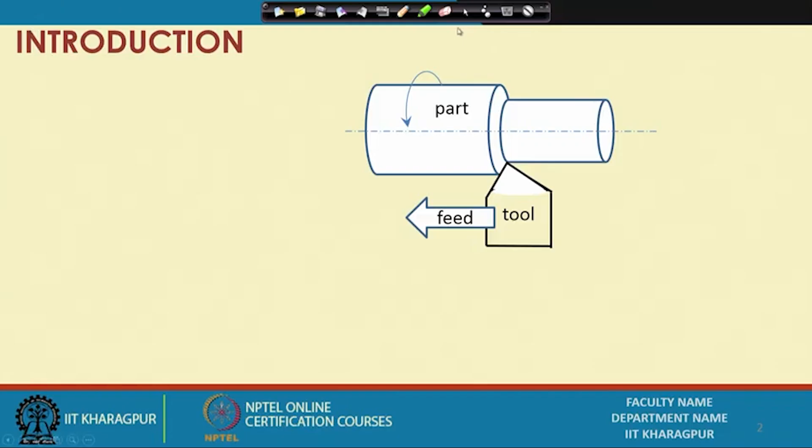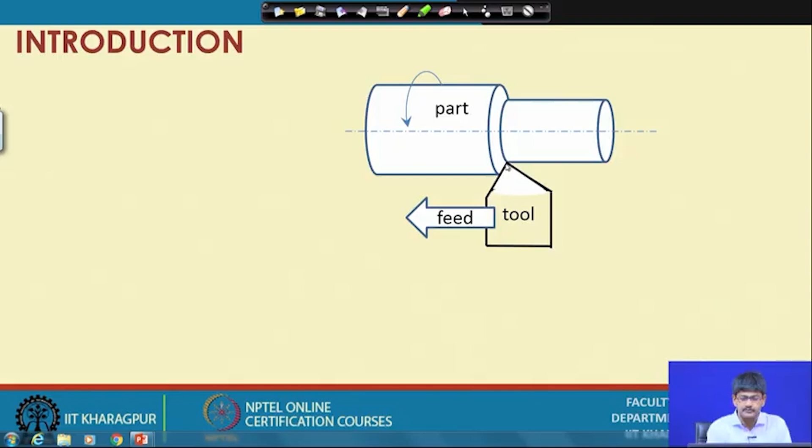Let us have a look at this particular figure. What do we have? We have here a workpiece or part or job shown rotating, and there is something called a tool or cutting tool. It is characterized by a sharp point and some sharp edges, and it is moving past the rotating member.

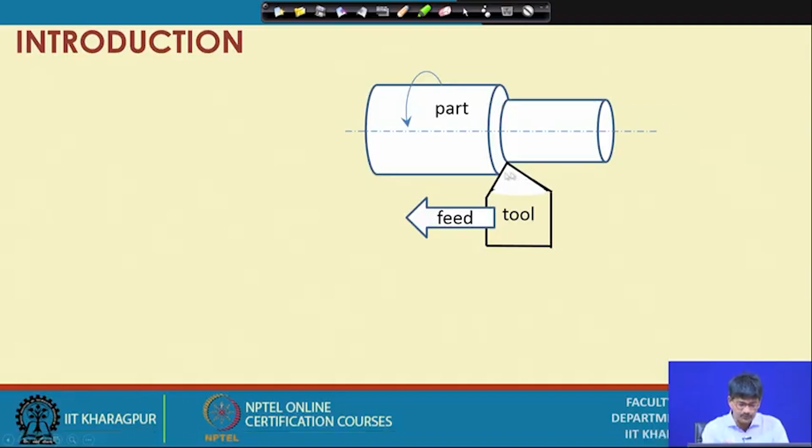Thus removing material. We will look at several other figures in which the removal of material is shown in more detail. When this part is coming here, it gets into the path of the moving tool and this material comes out in the form of a chip. A ribbon of material is removed here.

So, removal of material from a part in the form of chips, so as to attain a desired shape and size. I want to attain a desired shape and size, and for that I am removing material from the main body, which is called the part or workpiece or job. I am removing part of it so that a particular shape is attained. This exercise is always carried out on a part where excess material is present.

But why would we do that? Because there might be intricate geometries present on the surface of the part which cannot be attained by other means. So immediately there is the identification of other methods of attaining a particular predetermined shape and size, and all these things together are referred to as manufacturing.

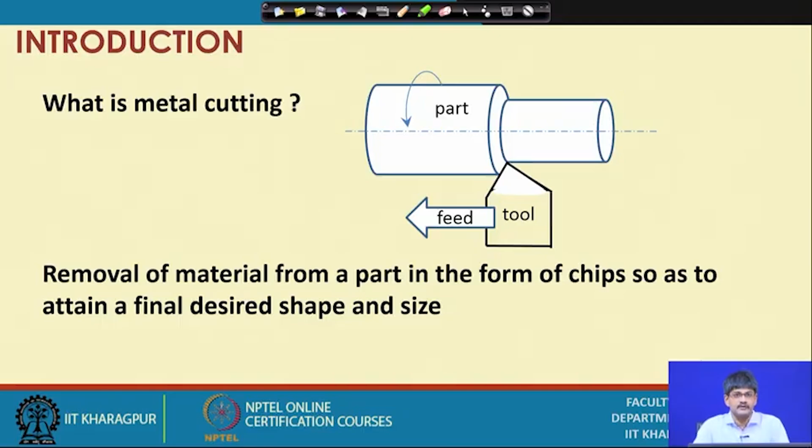Let us have a quick look at what manufacturing is all about. Attaining a predetermined shape and size, this is what manufacturing is all about. We can have different ways of manufacturing these shapes and sizes, and metal cutting happens to be just one of them.

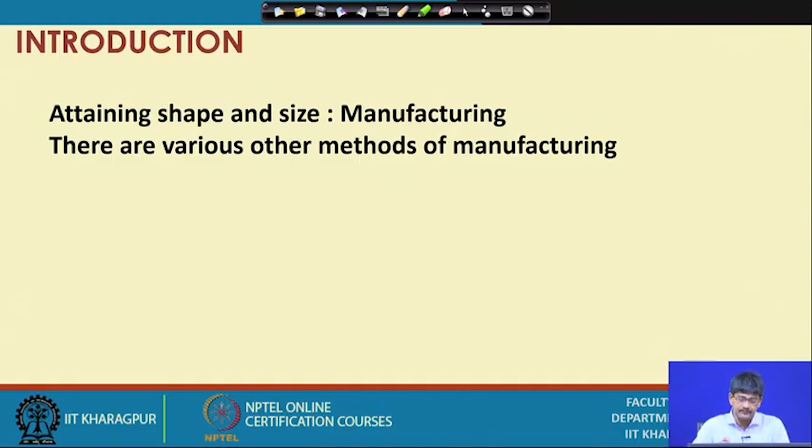So let us have a look. What are these methods by which we can manufacture parts of different shapes and sizes? We can have casting, forming, welding, conventional machining, non-conventional machining, and rapid prototyping. These are some of the main methods of attaining shapes and sizes. There can be other methods also, including hybrid methods, that is a mixture of two of the processes.

Now, where is metal cutting? I cannot see metal cutting or material removal listed directly. Metal cutting belongs to this particular group, conventional machining. Material removal, conventional machining, metal cutting, metal machining, etc., all these things belong to this particular group.

Why are we calling it conventional? Because we are going to apply certain practices, certain types of material removal which can be categorized under a single principle of material removal, and that we are calling conventional.

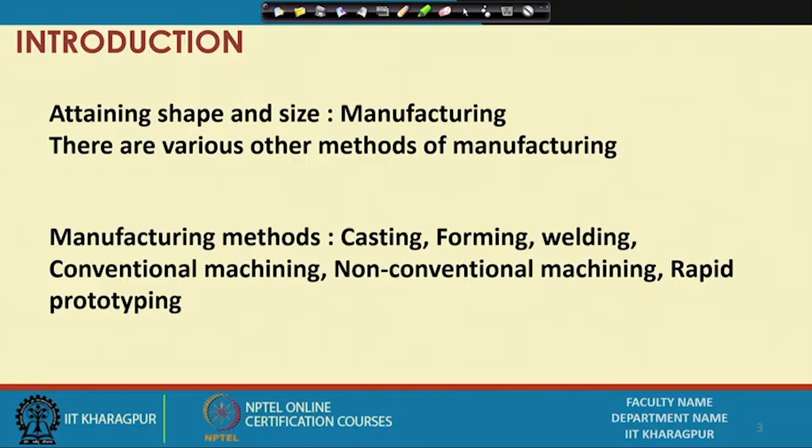I will just try to give you the idea of casting, forming, welding, etc., so that we have a brief overview of the main methods of manufacturing.

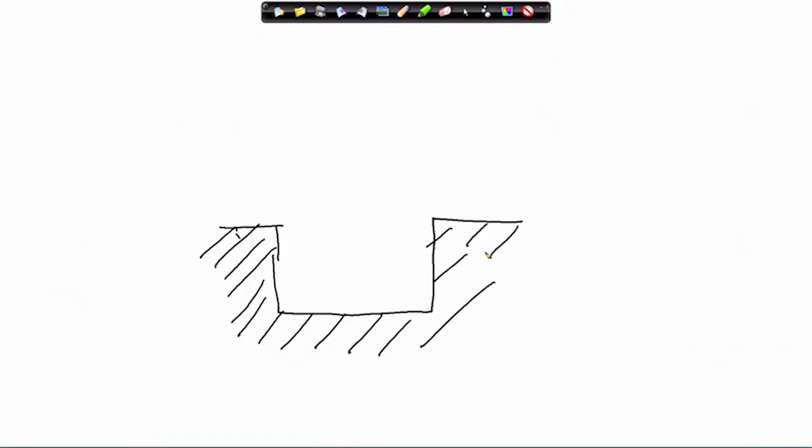Suppose I have a cavity. I am showing very simple principles. So some material is here, so that a cavity is formed. Inside this cavity, I pour molten metal.

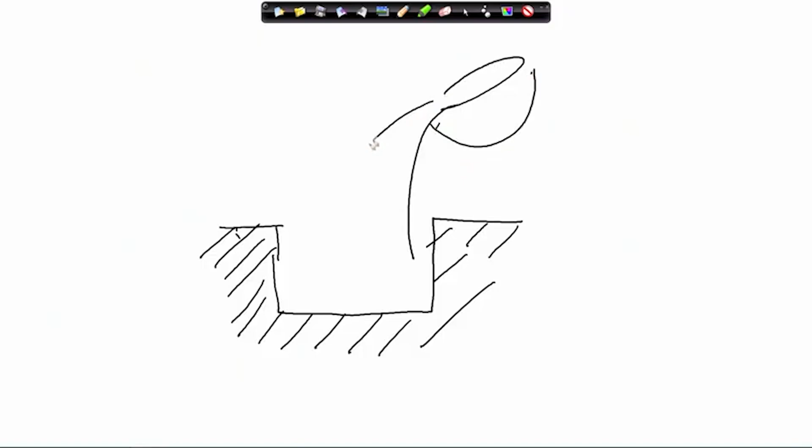Ultimately the molten metal will solidify. If it solidifies, it will attain the internal shape and be of a definite size. So this is casting.

Melt the material, pour it into a cavity of predetermined shape and size, and when it solidifies, we can take it out. We can remove this particular sand mold which is shown here - that can be destroyed, and we can take it out, and we will get a solidified body.

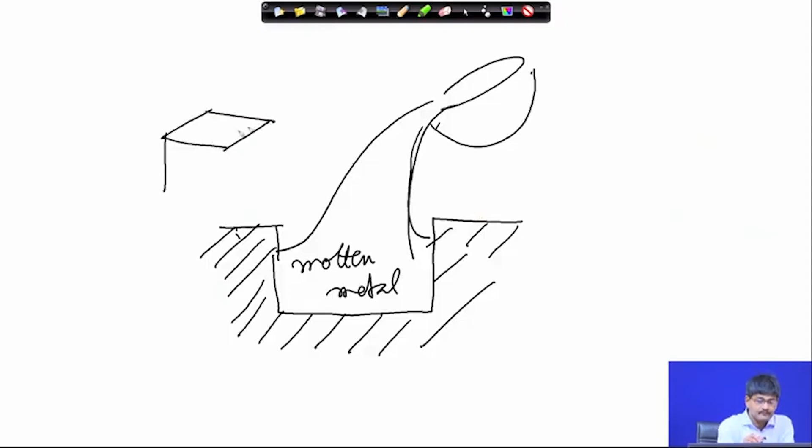Say it might be something like this. And if this is exactly the shape that you wanted, and you are satisfied with the rough surface roughness and whatever imperfections might be there, that is it. In a single process you will be achieving what you wanted.

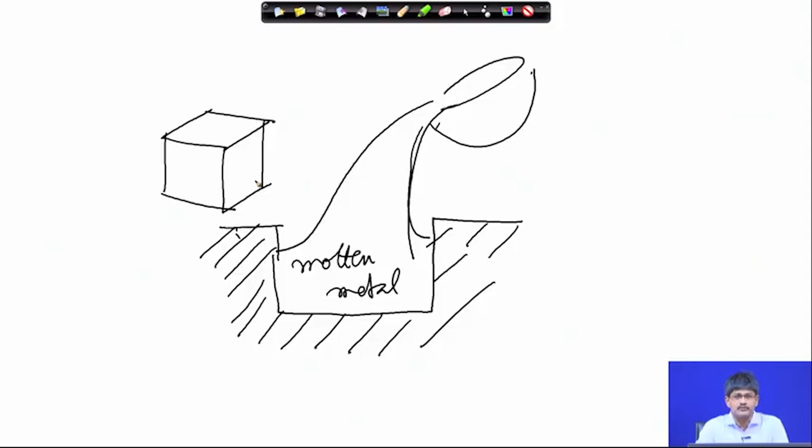If however there are some surface imperfections which you have to do away with, or the surface is too rough, or sand particles are sticking to it - so many other sort of defects can be there. In that case, what we do is we go for secondary processes, in order to make the job or the part or the workpiece or the casting acceptable. So this is what casting is all about.

We basically go for melting and resolidification in a cavity of predetermined shape and size. There are so many other details about casting which I am not touching here, because we just want to have the basic idea by which this particular process works.

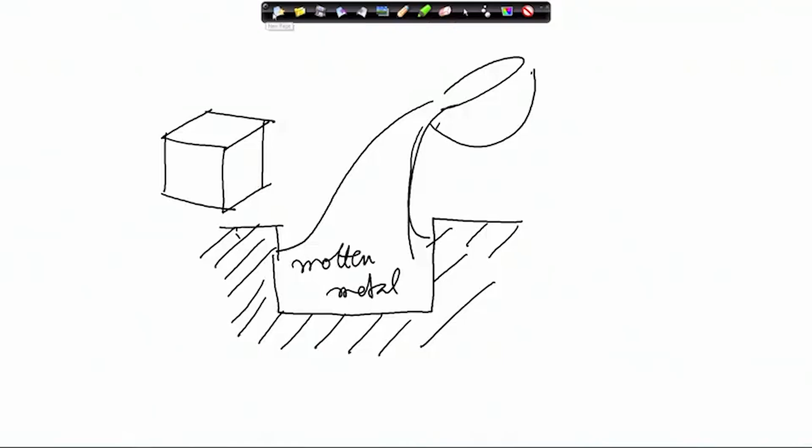So let me quickly go to another page. Here welding - what are we doing? We are fabricating, connecting up these two pieces that need to be joined. So welding is a joining process, we can build up shapes with that.

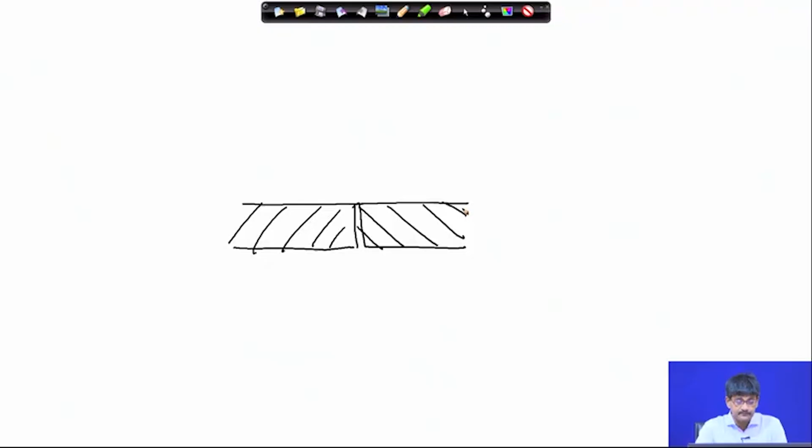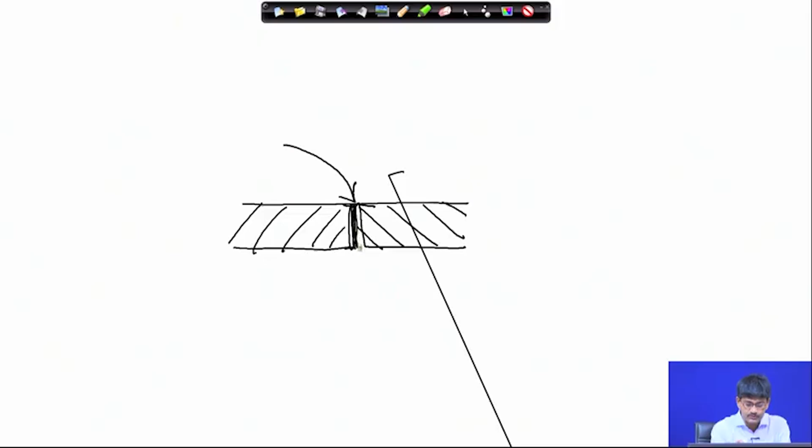Some material in between, or make them very close together and heat them. So if I have two such materials, this is one, this is the other, and I heat them at this point so that this part melts. When it solidifies, this will be a single piece, so that we can join parts and make up shapes.

Our main concern is to make shapes of predetermined shape and size. Many times you might have seen, even in civil activities, gates, grills, window grills, etc., made very elegantly by welding. Just imagine if welding had not been there, how would you have done these things? It is a very important manufacturing process. So we come to know of casting, we come to know of welding.

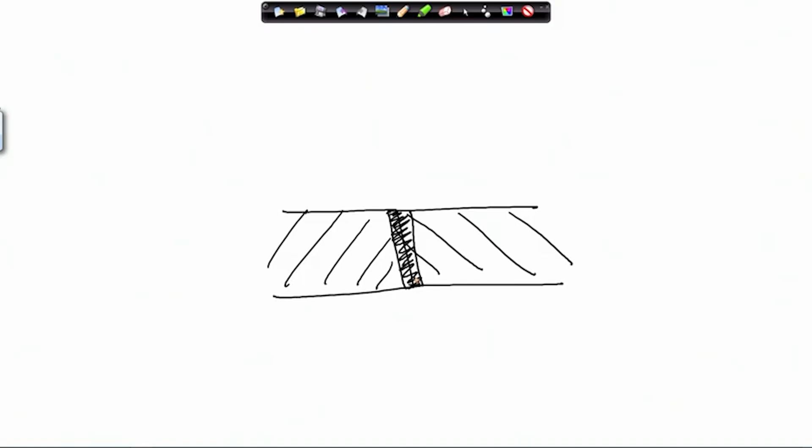Welding can be of different methods, but that is not our concern today. Our concern is to get an overview of the different manufacturing processes, so that we understand where exactly machining or metal cutting or material removal process stands.

Next, we come to forming. Let us have a quick look at forming. Forming method essentially involves deformation - I deform a particular body into a definite shape. Let us have an example. This is a very simple and explanatory example.

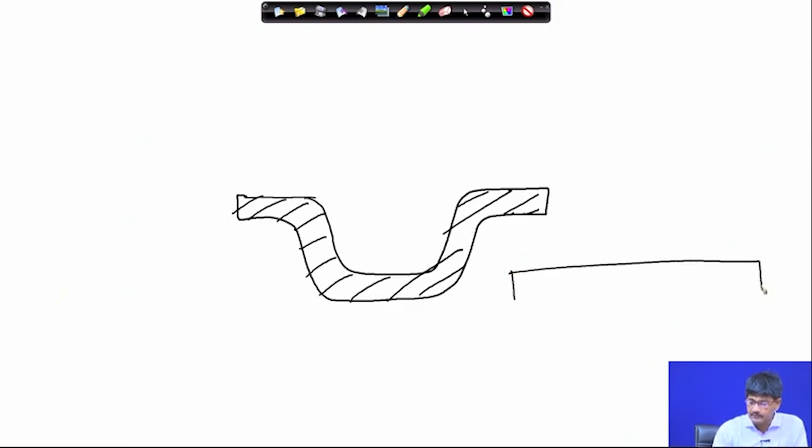Someone shows you this part, a sheet metal, and we are seeing it only from the side, a sectional view. How was this done? It was done by deep drawing. What is deep drawing? Initially there must have been a body of this type, a sheet metal piece, maybe circular, and there was a punch.

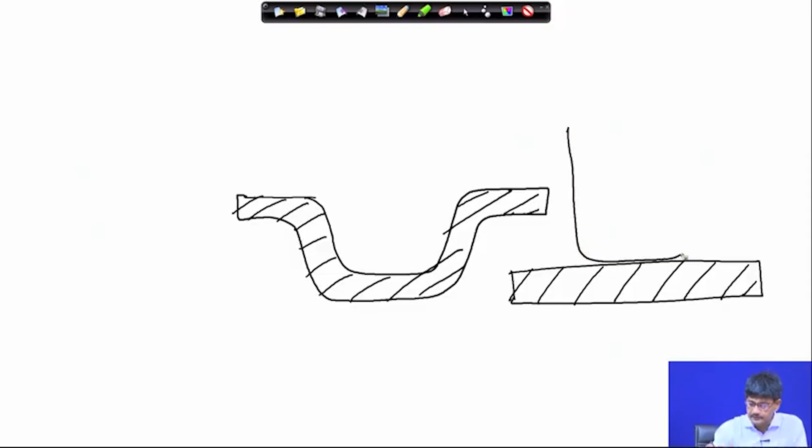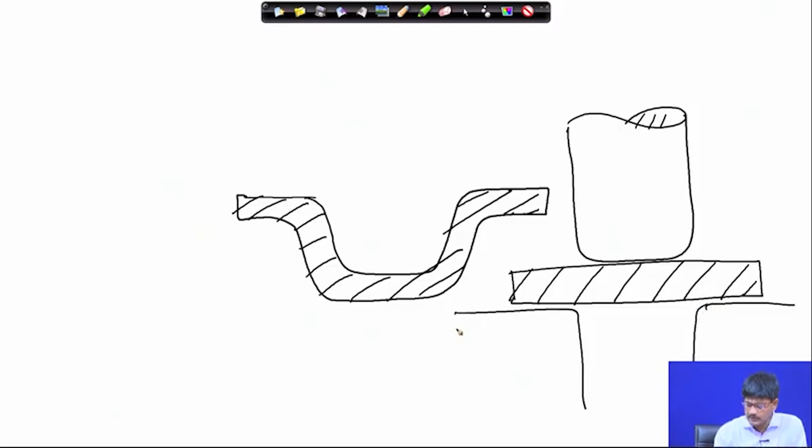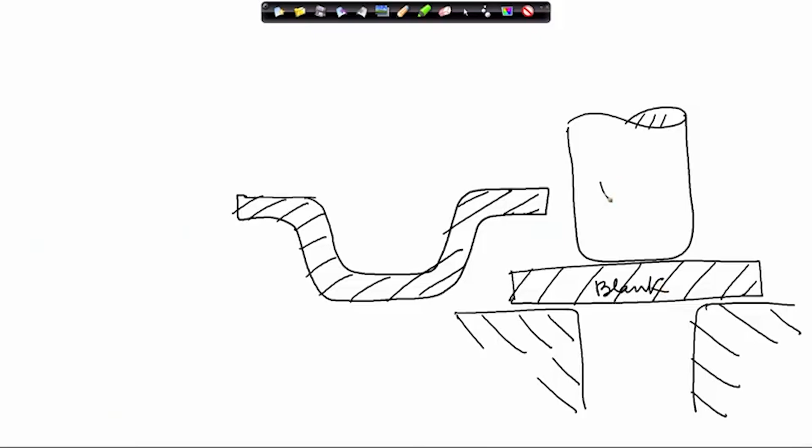And there was a die. Now what are these punches and dies? They must be made of hard and tough materials, so that they do not deform, but this deforms. This is our blank. Blank refers to the shape of a part before machining or before metal forming or before any such formative or manufacturing process. So this we call the punch, this we call the blank, and this we are calling the die.

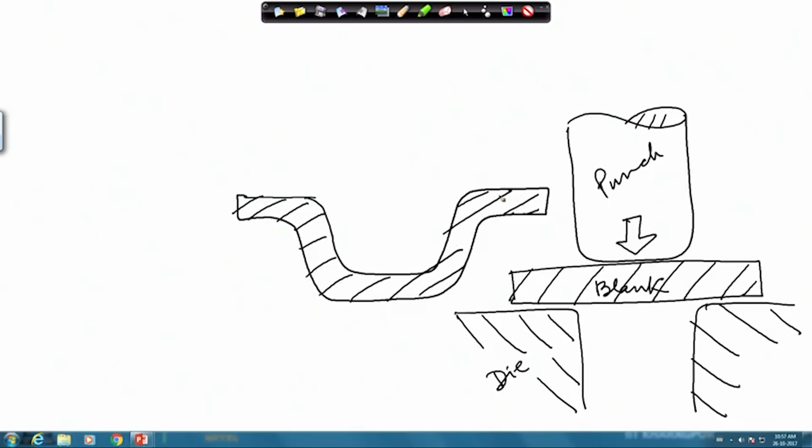So if this goes down, we will have gradual deformation, and this is one intermediate step. When it is fully through, this will be drawn in the form of a cup. At that time the shape, the internal shape will correspond to that of the punch outside shape. It will be a conjugate of that surface, and the outside diameter will correspond to the inside diameter of the die.

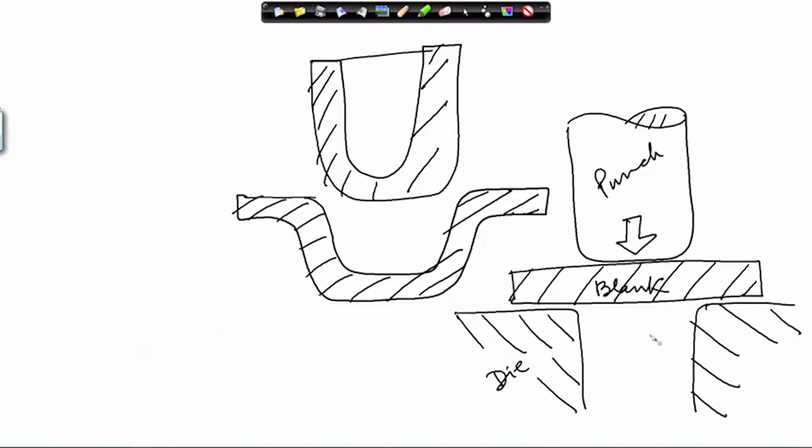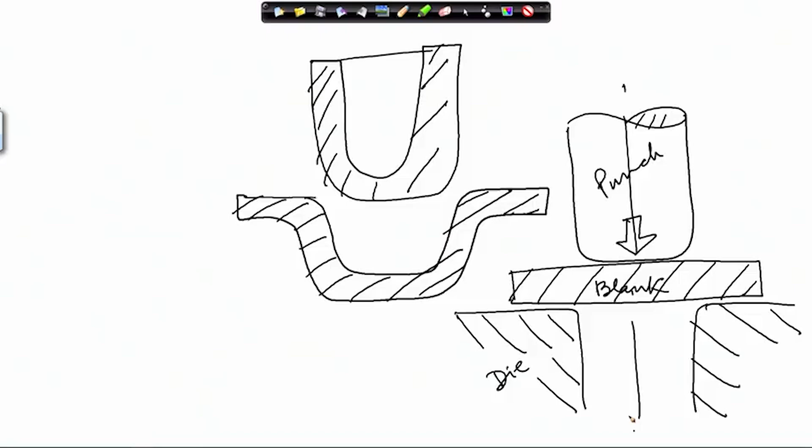So this is one example of metal forming. You can deform a body into shape. You are not having removal of material in the form of chips, you are not having melting, you are not having joining, but you are basically deforming by plastic deformation. Please note that had it been elastic deformation, it would have sprung back into shape. So it is definitely plastic deformation, which means that once it is deformed, it cannot come back to the original shape.

So what is this called? This is called deep drawing, and there can be other methods also. For example, there can be rolling, there can be forging. There can be extrusion, there can be back extrusion. So many methods are there. But as we just need to have an overview, I'm sure that you will get the basic idea of metal forming from this example.

Next, when we are talking about - so this part we have already discussed, overview of casting, forming, welding. Conventional machining we are going to discuss, that is actually our topic, and non-conventional machining, let me give you a quick idea about some of the processes.

Non-conventional machining, say I will start with laser. I need to make a very narrow hole here. What kind of dimensions am I talking about? I am talking about, say, dimension of 250 microns. If it is 250 microns, it means it is 0.25 millimeters.

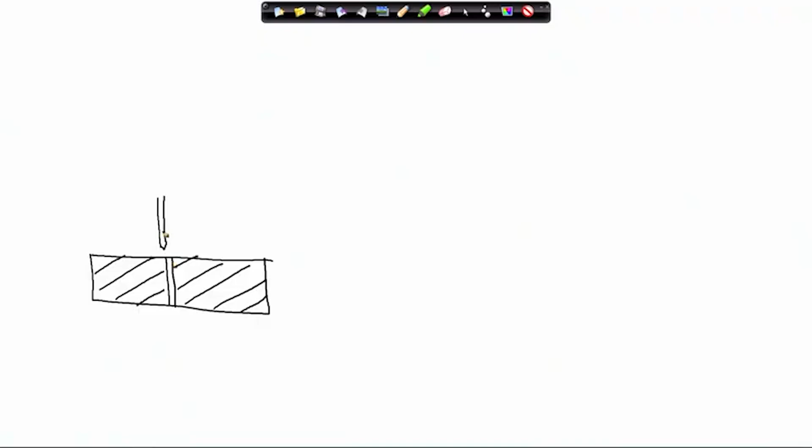So as the drill is becoming narrower and narrower, smaller and smaller diameters are being cut, we have the possibility of drill snapping, or it might even buckle if the L by D ratio is very high. What defines the L by D ratio? If you have the drill coming here, conventional drill, this has to get inside, so its length has to be at least larger than this length. So if this length is very high compared to the diameter, you have a high L by D ratio drill. That is the problem, because it might buckle even if it does not snap under the stresses. So there is indeed a high degree of difficulty in drilling such a hole by conventional means.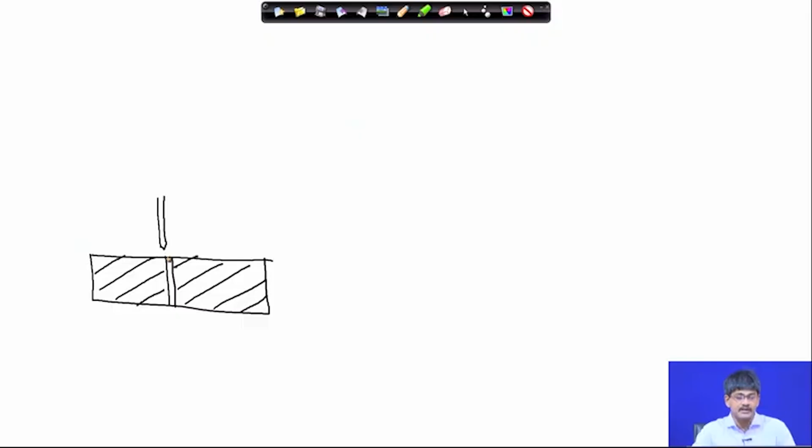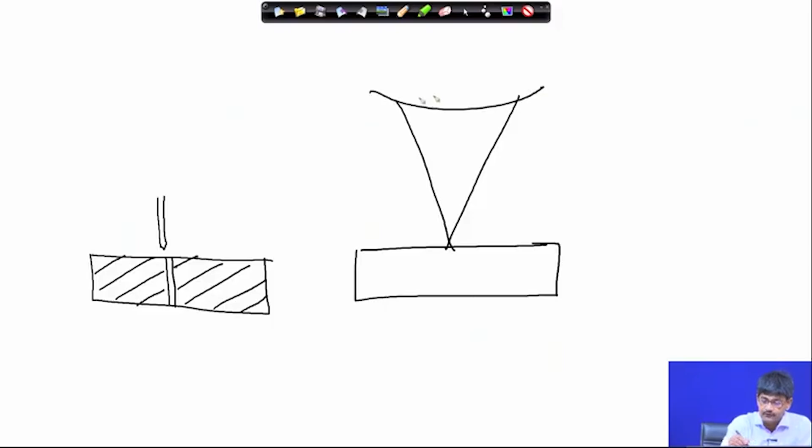Let us now think of the laser. How can the laser solve the problem? It can have this job under the laser beam and a lens is focusing it here. The laser beam is basically a light beam, electromagnetic radiation. If it is focused here, since the laser has coherence, there will be phase coherence here, so that there will be build up of intensity, and this energy will be converted to heat energy.

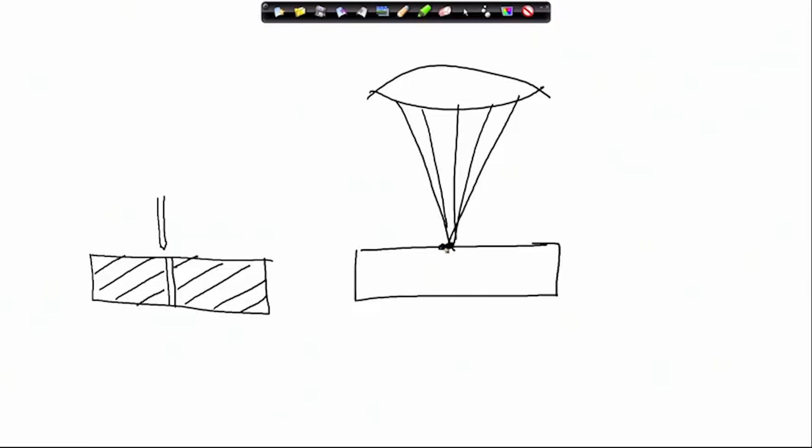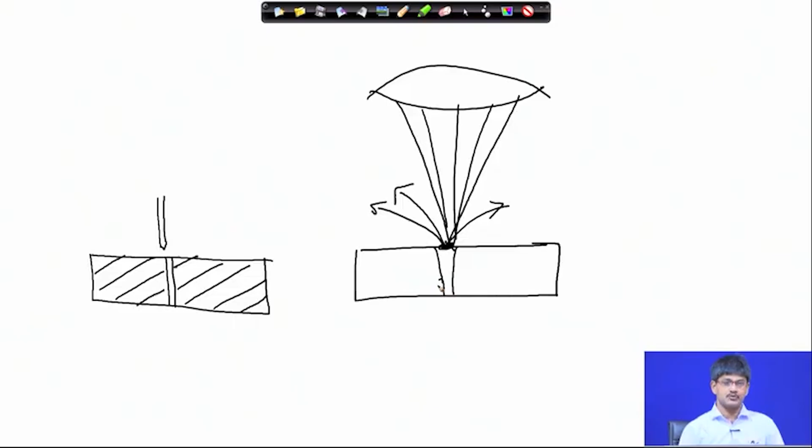Most of the energy will be converted to heat if it is not reflected or lost by some other means, and there will be a tremendous temperature rise at this particular position. This temperature rise will give rise to melting, evaporation, and ultimate removal of material in the form of vapor or liquid ejection. We find that a hole is initiated, which hopefully will propagate right through, so that we have a hole. So instead of using conventional means of applying mechanical force and a sharp edge, we can remove material this way also.

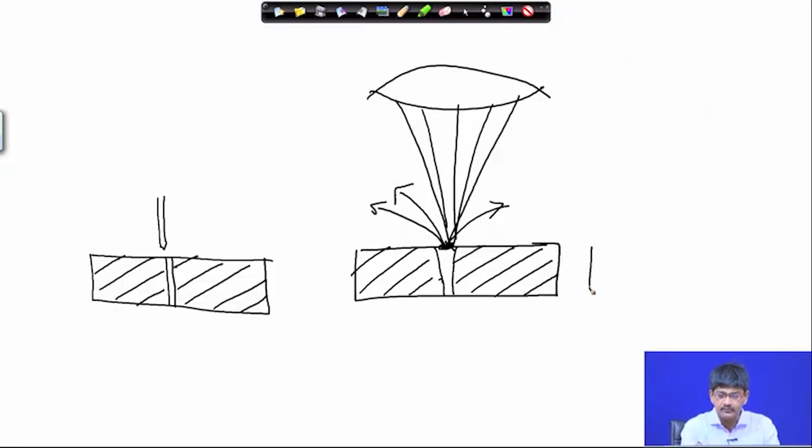This is one non-conventional method. Other methods can be shown as well - you have the tool here, and you have a job of this type.

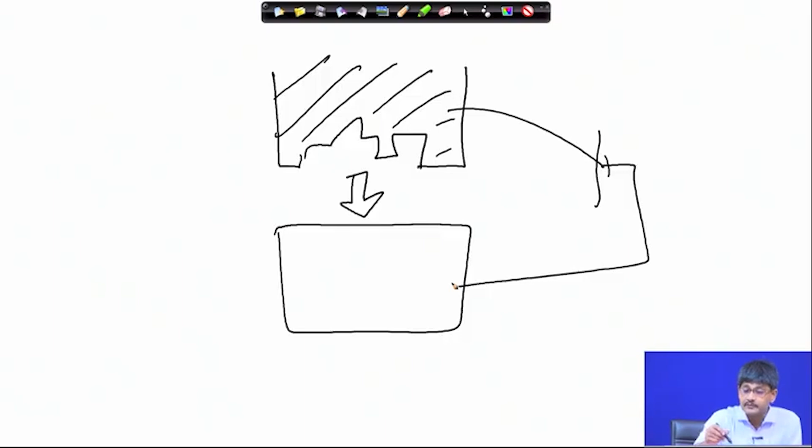You bring it towards the job, you give it electrical connection, and you submerge the whole thing in an electrolyte solution, say NaCl solution.

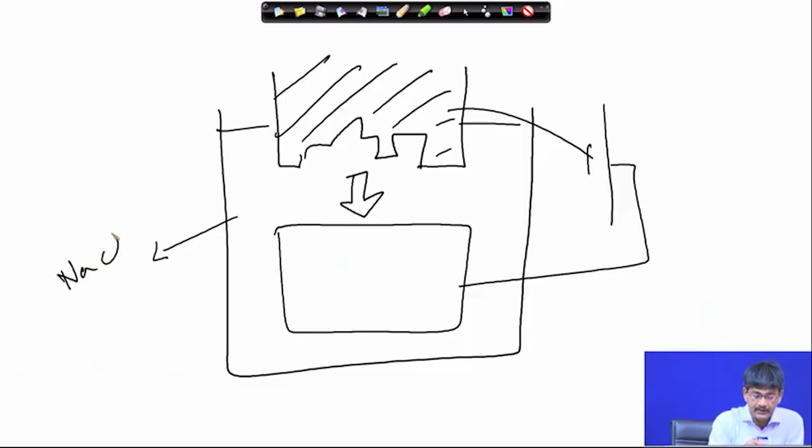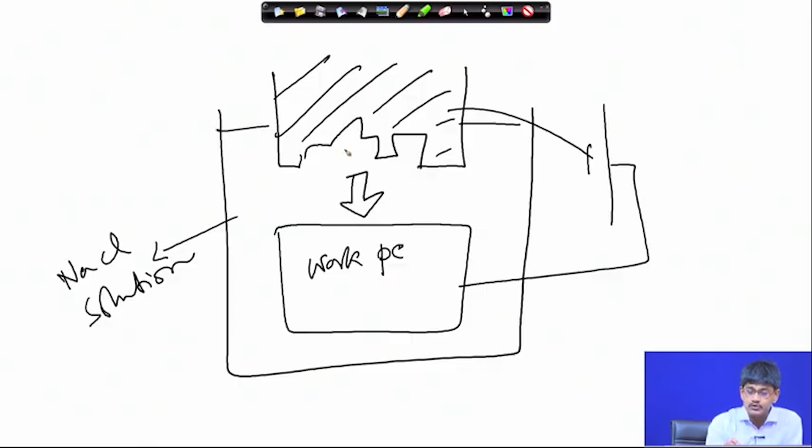This is once again your work piece. At this moment, it is the blank. So the conjugate of this surface will be produced, because other parts, like this protruding part, will be dissolving electrolytically. This will be dissolving, this will be dissolving, etc. What will remain is the conjugate of this, so you will find that this part has been produced. Of course, there are some mistakes in this drawing.

These surfaces will create some issue for us, so please consider that actually only straight or tapering surfaces will be produced, but this will produce a reentrant side here at this moment - that is a mistake. It is very difficult to produce these surfaces. So we can dissolve material instead of mechanically stressing them. These are some non-conventional methods.

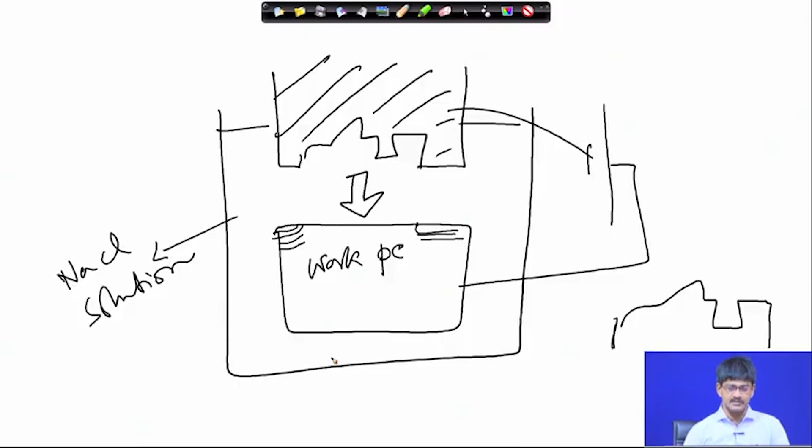Let us come back to our original discussion, the discussion of metal cutting. If you have a look here, metal cutting involves a cutting tool, workpiece, fixture, relative motion, and in many cases an operator. What do we exactly mean by this?

We mean that just like we were having some active member which was removing material from the workpiece or blank, in case of metal cutting we have something called the cutting element or cutting tool, which actually removes material by dint of its higher hardness, the presence of at least one or two sharp edges on it, and by its wedge-like shape. So a cutting tool is required for removing material.

The workpiece has to be there. That means, naturally, if you are giving shape to a particular body, that body has to be present, and it is important that the blank has higher dimensions than the final job - this is called machining allowance. We allow some extra material to be removed so the final shape can be attained. If you do not give machining allowance, then you cannot machine, because there is no material left that can be removed to produce the final job.

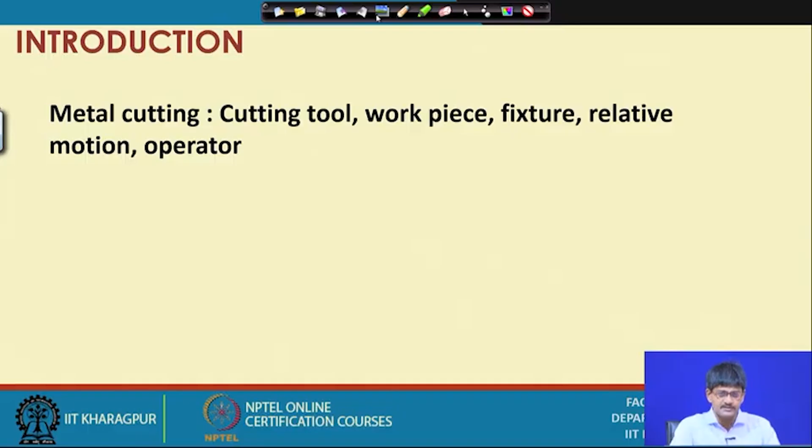What is the problem with that? If you produce the exact shape by some other means, like casting, welding, or metal forming, there is a chance that the surface characteristics present might not be suitable for the final application you are planning it for. Suppose you produce the exact dimensions by casting - what is the guarantee that the surface will be acceptable? If the surface is not acceptable, you have to do some machining on the surface, and there you have no machining allowance left if you planned it that way. So some machining allowance has to be there, just before you start machining.

So by the workpiece we understand a blank. Next, fixture - what is the meaning of fixture? Fixture has a specific meaning in metal cutting, but for the time being we are referring to fixture as some sort of fixing or holding steadfast the workpiece and the cutting tool rigidly.

If you want to hold the cutting tool and workpiece rigidly, so that when they are in contact with each other and have relative motion, they do not get displaced or deflected, or slip out of their holding positions - that means hundreds of newtons might be acting between them, and they should not lose their rigid position at that time. If they lose it, then machining will not be possible.

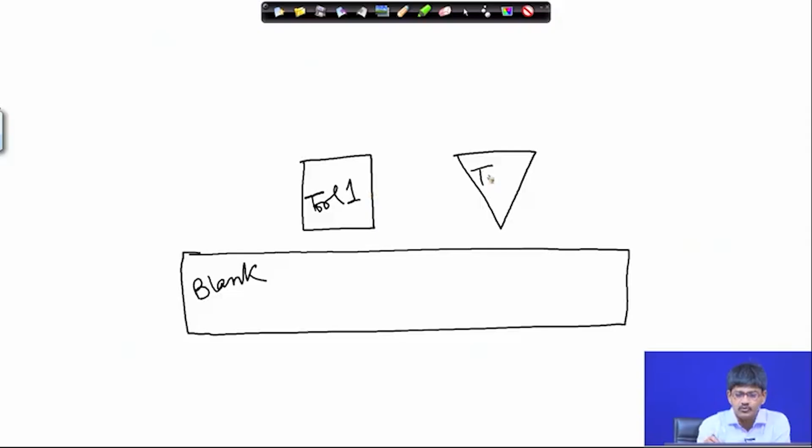See, if we are having a body of this type, these are two bodies, say extremely hard and totally rigid, with no question of deformation, and just beneath them I have a blank piece of material. This is our blank, and I am having tool 1, and tool 2. Among these two tools, I am asked to operate them and remove material.

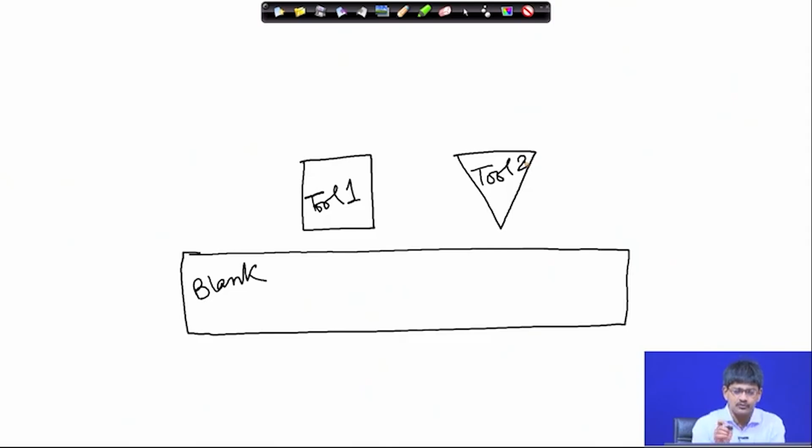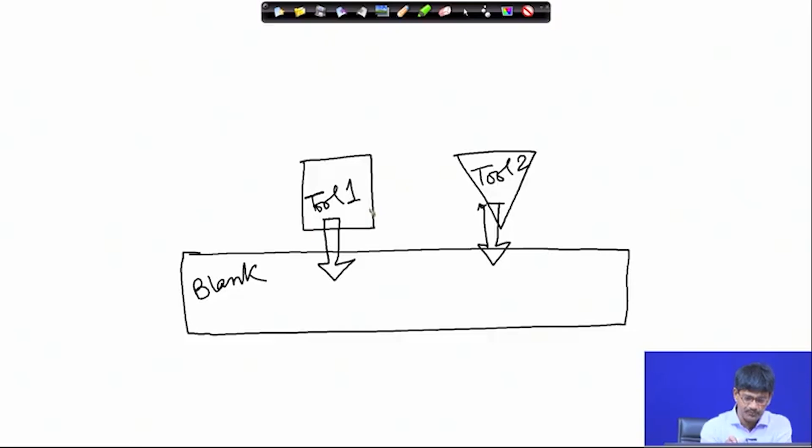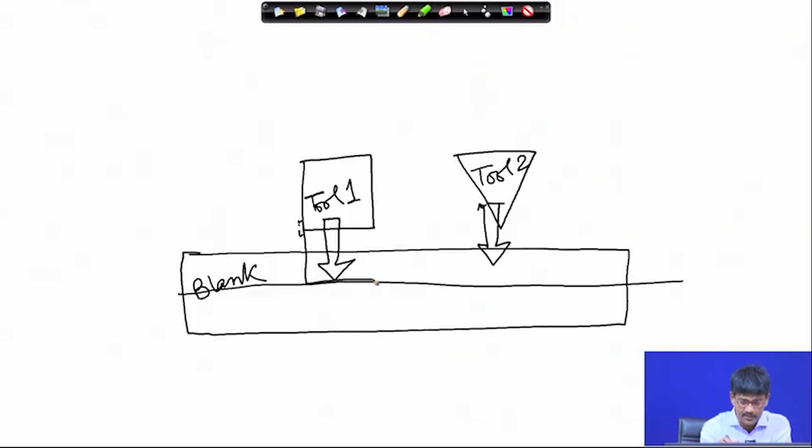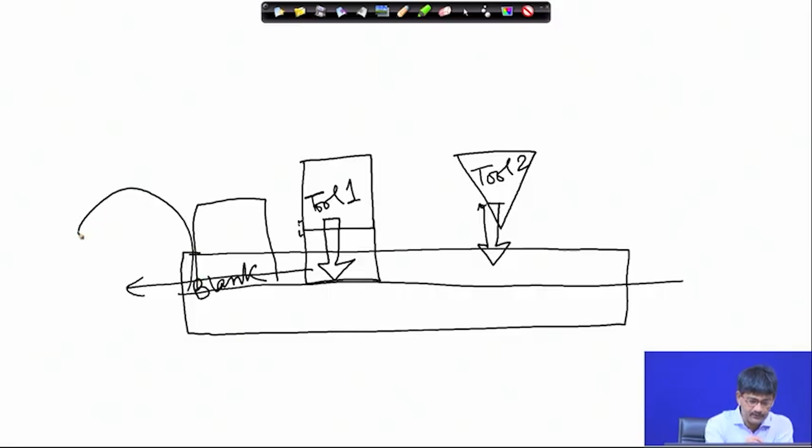So what are we supposed to do? We first do an indentation, penetrating this tool inside, and this one also inside, and then we produce relative motion. If a definite shape is not a basic requirement, suppose I want to remove material up to this point. In that case, this comes down, I apply forces so it comes down right up to this point, and then I move it this way, so this whole thing peels off. When it comes here, you will find it peels off in the form of a ribbon-like material called chip.

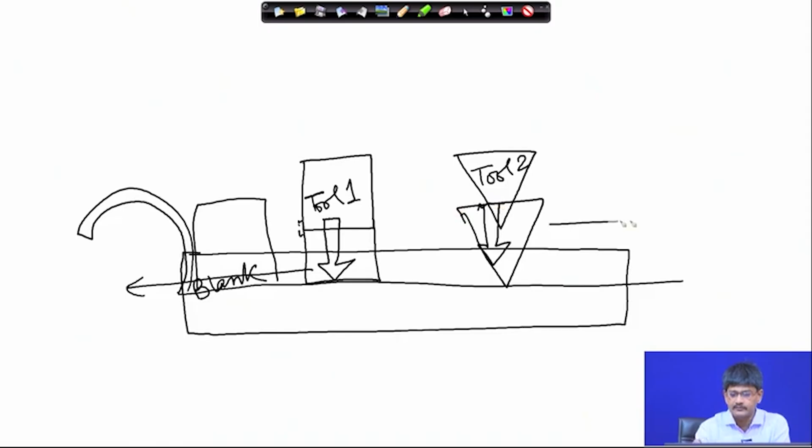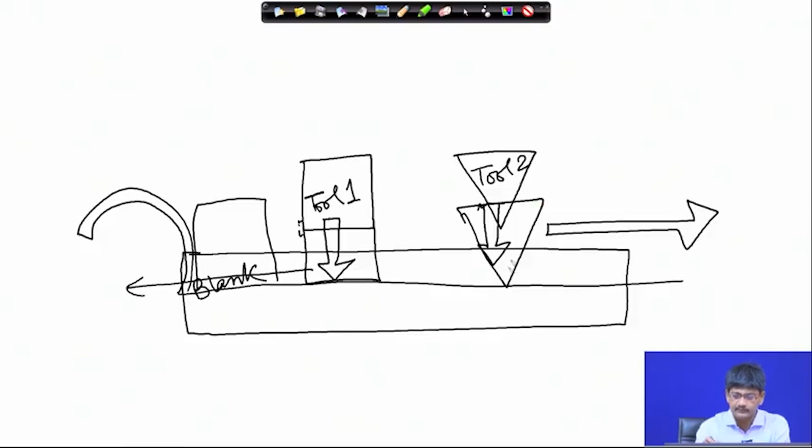Here also, if you move it up to this point and remove this, it is basically a case of indentation or pressing, creating an indentation and then moving this way. The same thing happens here. So what is the difference between them? Here there will be a tremendous force you have to apply unnecessarily, because with the other tool, how is this characterized? It has a wedge shape, something like this, with a sharp point. With this it can easily penetrate, while this cannot.

That is why generally the tools have to have this particular shape, because it is easier for indentation. So when it indents and starts moving towards one side, and if these two bodies are rigidly held, we can have removal of material. So sharp point, wedge shape, and we will also learn that sharp edges always help us remove material.

We have identified what should be the desired shape of the tool so that it can remove material. You might say, why not this shape, say a knife? Introduce it this way and then scrape off, cut it here so that this comes out.

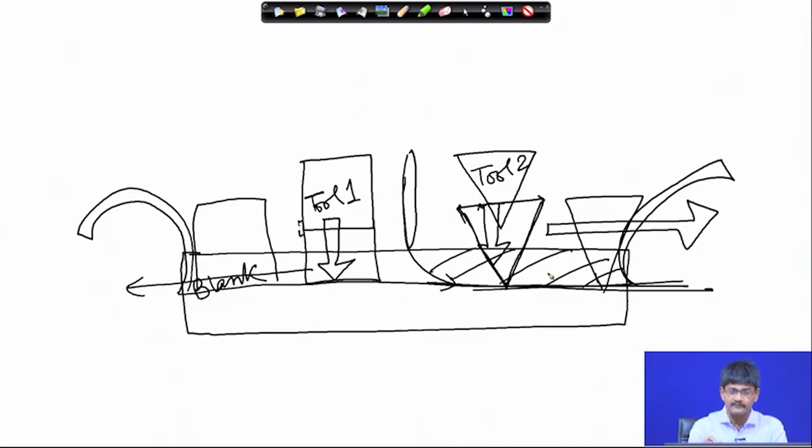Problem is, now we are talking of removal of metal, not removal of soft materials, for example bread or butter or chocolate, or ice cream. No knife will be able to sustain the heavy forces which will be coming when you are trying to cut metal. If you are trying to cut metal, these have to be sizably robust.

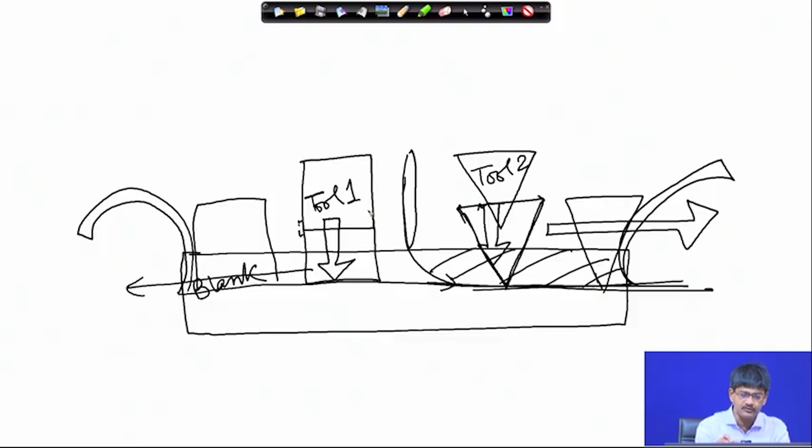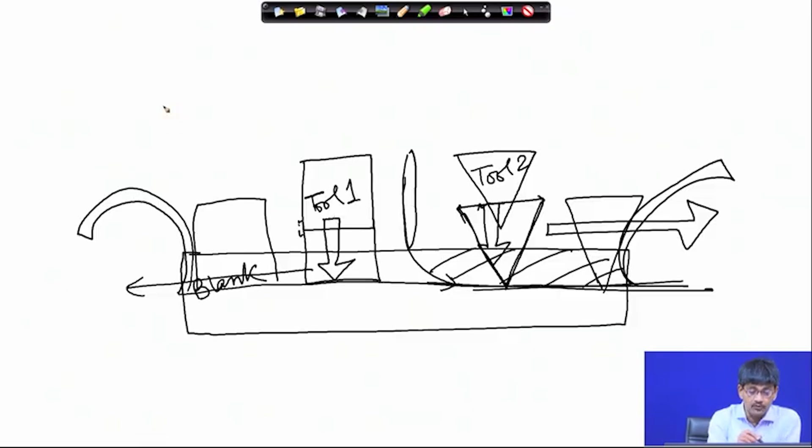That is why whenever you see cutting tools used on the lathe or the milling machine, their size is quite robust. You might be having a cutting tool of this shape, and it might have made you curious why we use a shape of this type. Why not a knife? If you have a knife, it would not be able to withstand the huge forces which are coming up.

So we have understood these things about metal cutting, what it is all about. Now comes the next aspect: the setup for rigidly holding the tool-workpiece pair and providing relative motion between them.

This is what the machine tool is all about. The cutting tool is that particular small piece which removes material by dint of its hardness, sharp point, and wedge shape. The machine tool is the body which holds the workpiece and tool rigidly so that they cannot deflect, and it also provides the relative motion between them. So cutting tool and machine tool are absolute necessities in the metal cutting system.

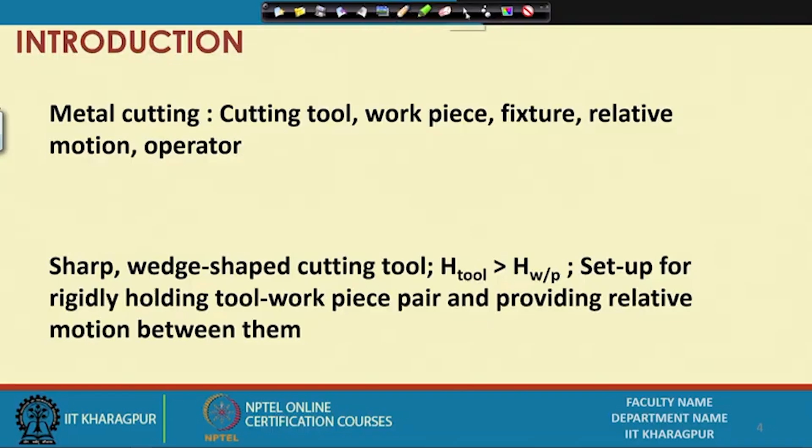Now let us go to the next slide, possibly the last in this first lecture. Let us have a look at how this whole thing can be done on the lathe. The lathe is the most common machine tool, and on that, surfaces of revolution are produced.

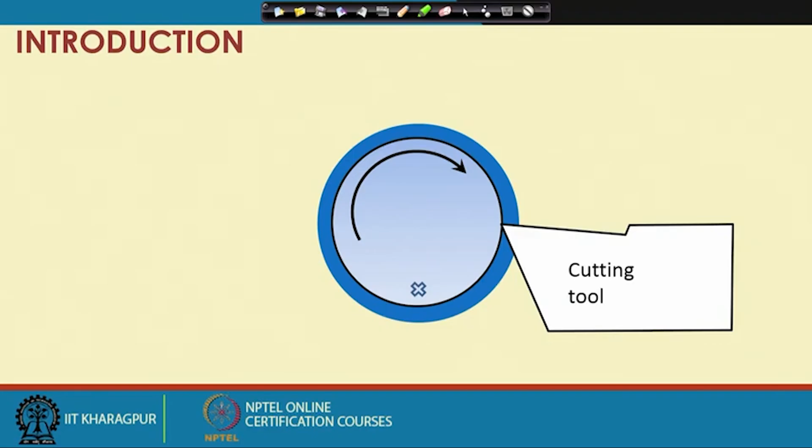Surfaces of revolution mean that about an axis the body will have a symmetric shape. Axis symmetric bodies are produced. For example, this body is a cylindrical body seen from the end. This is the axis of rotation. It is rotating this way, and this is the cutting tool, that wedge shape.

It has indented or pressed inside by a certain amount. This is the depth up to which it has moved in, and after that relative motion will be produced by rotation of the cylinder. The cylinder is rotating while the cutting tool is not, therefore relative motion is produced. If this relative motion is produced, and they are held rigidly, then material will be removed in the form of the chip, the material coming out.

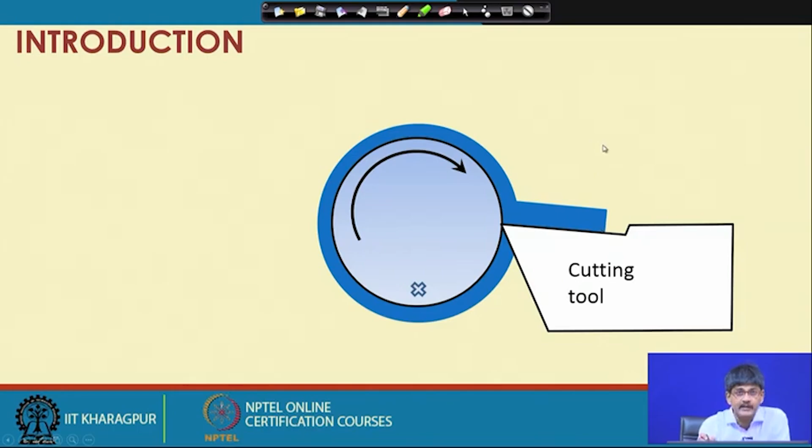On the tool, material comes out, it might be slightly curling up also depending upon the cutting conditions. So we understand that the job or workpiece rotates and the chip comes out. This is the basic model of material removal, specifically taken up in this example on the lathe.

Now that we have identified all those things, we can find them all here: wedge shape, sharp point, chip coming out, relative motion being provided to the blank, so that this material is getting removed in the form of the chip, and you are going to get a smaller cylinder.

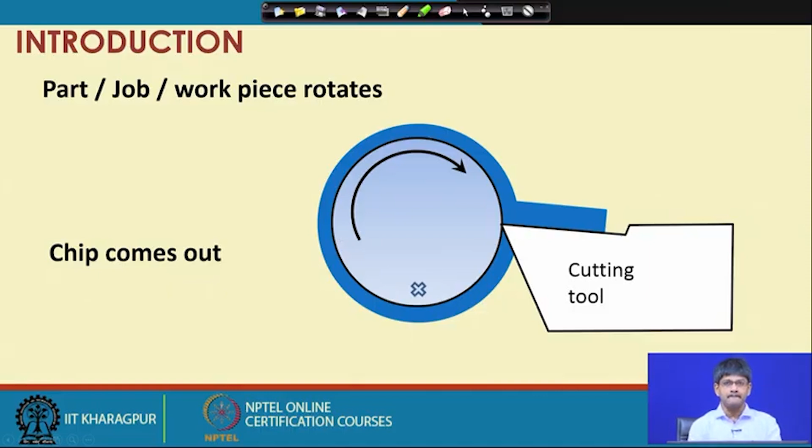Now that we have identified the basic requirements in the process of metal cutting, and its exact position in the family of manufacturing processes, in the next lecture we can take up more detail about what a cutting tool is and what a machine tool is. A cutting tool can be characterized by different geometry elements, which we will take up in more detail. After describing the cutting tool, we will describe different types of machine tools. That is the end of the first lecture.